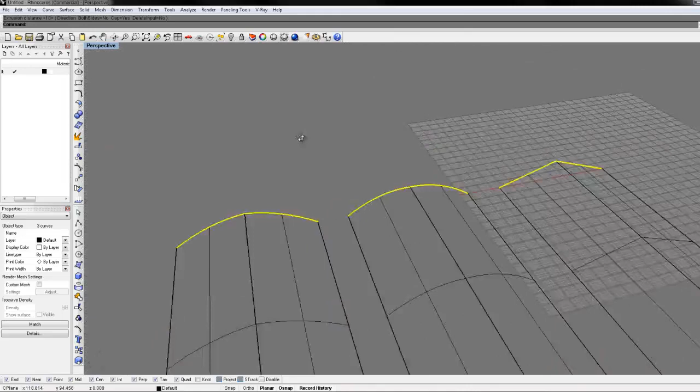So I've got these three lines here. I'm going to join them, so I'm going to extrude them. And they look pretty okay, but there's an issue here, and you can't see it until I turn on the shading or even the rendering. I'll give you a better idea.

So it's a little tricky to see, but there's actually a kink in both this one and this one, and this is due to the fact that the curves don't match. Now, this might be something that you're looking for, like a hard edge, and that's great.

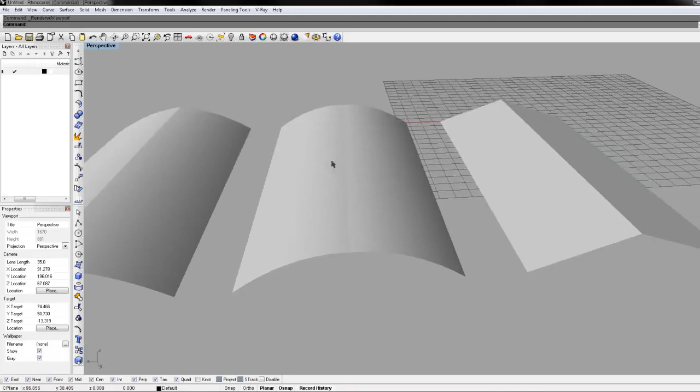But if you want something that's smoother, you need to do something called matching. Now, I'm using this one on the right as a control line so you can see what a pure kink looks like. And if I wanted to fillet this, I could select the edge, hit enter, and that would be nice and smooth. But if you want something that's truly flowing, what you need to do is match the curves.

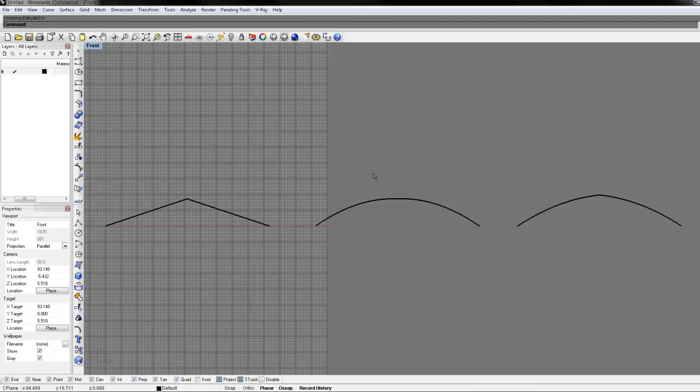Or if you forget, or down the road when you already have your surface built, you can actually match the surfaces. So I'm going to show you how to do this. We're going to hide this one because we don't need it, and we just want to focus on these two.

And the reason we're focusing on these is the idea that if I draw a line across here, you can see sort of how the tangency of these two curves work. With this one, the tangency, if I bring this up and look at it, it looks tangent until you zoom into a straight line and you can see it actually comes above the line.

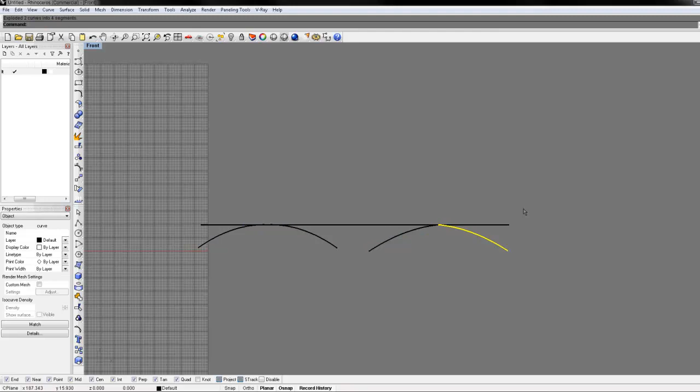We don't want that. I'm going to explode these back so each curve is on its own. And we're gonna match these so that they're truly tangent. One's gonna be tangent and one's gonna be continuous.

What you type is match, and then I'm gonna click on the left one and then click on the right one. And this prompt will come up in Rhino, and this sort of surface and edge and curve continuity are a pretty normal thing. So there's options like this within just about every 3D program.

I'm going to average the curves because I want to eventually join them. And since I have the join option here, I can join them right now and save myself some time.

So the continuity of the curve is sort of how this flows. So if I were to just click on position, nothing's really going to change here, but I want the tangency to be right. So if I toggle between tangency and curvature, you can see what's happening.

Look down here at the lower ends near the end of the curves. It's just a difference in how it flows together. I want this to be tangent, and the other end, meaning the end of the arc, we're going to have that be tangent too. So this is the closest option to what I drew.

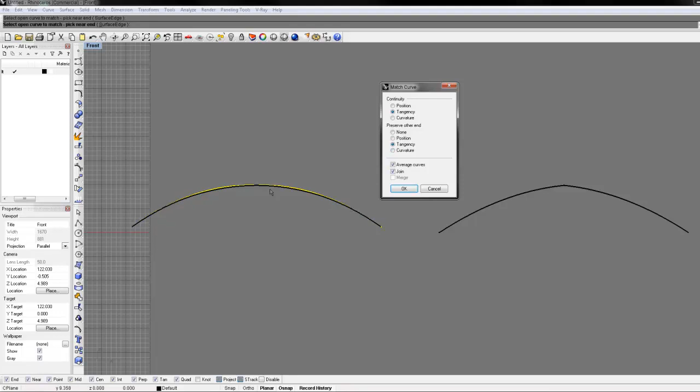If I do curvature, actually curvature is a little bit tighter, so we'll use that and click OK. Now when I extrude this one and render it, you get rid of that kink in the surface. So it's a nice clean surface.

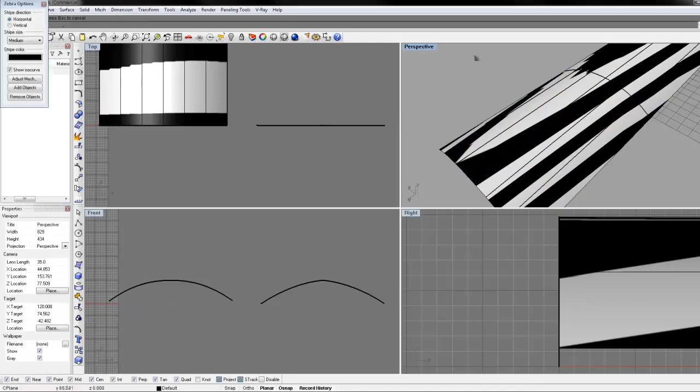There's a surface analysis tool called Zebra built into Rhino, which you can turn on and select your surface, and these lines will show you how your surface continuity is flowing across. This is exactly what we want—nice and clean.

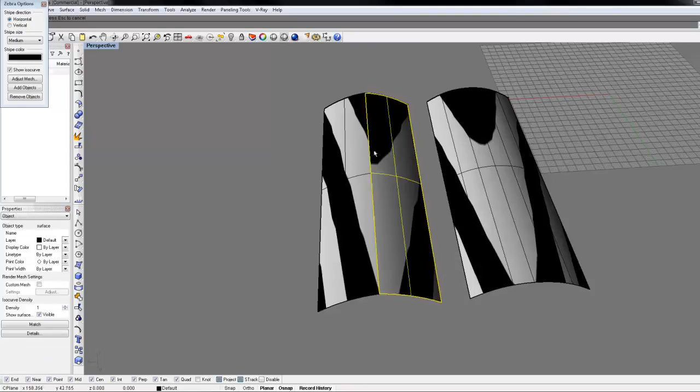If there's a break there, you know you have a kink in your surface. I'll extrude this one again and show you what that looks like broken. You can see the lines don't exactly match up on this one, and that's just due to the fact that those two curves aren't aligned perfectly. We can make these a little thinner.

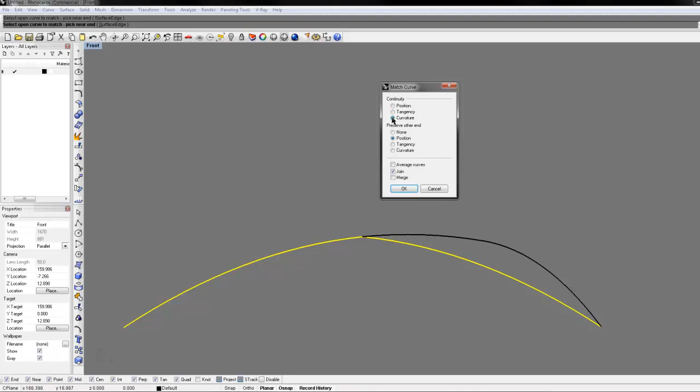So for this one, I'm going to do the same thing, only I'm going to join the curves, and I'm not going to average them either. I'm just going to affect the one side—this curve right here is the one I want to affect. You always select the one you want to affect first. We're going to join them with position, because we want this to start at the same point. We want it to be sort of a curvature, so it's nice and broad.

Click OK. Now that's one curve, and when I extrude it, you can see it's no longer having the kink. However, because of the continuity I chose, it does have kind of a harsh rollover right here. For this exercise, that's fine.

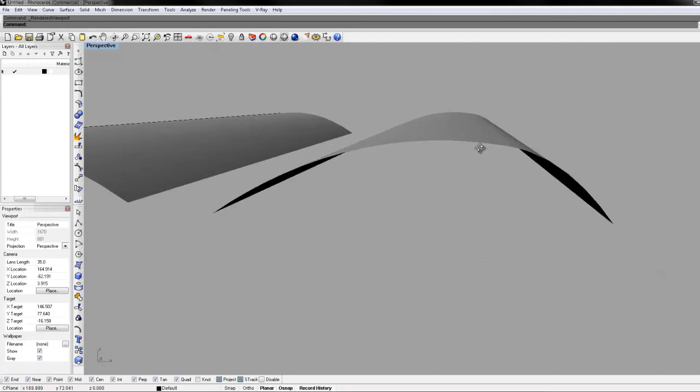The easiest way to control this is when you're building your original curves to just make them as clean as possible. Meaning, if this is initially what I was going for, this is what I should have drawn initially—it was too far deviated from what I originally drew. This is what I originally drew with the intention of joining these curves together and having it be one fluid arc.

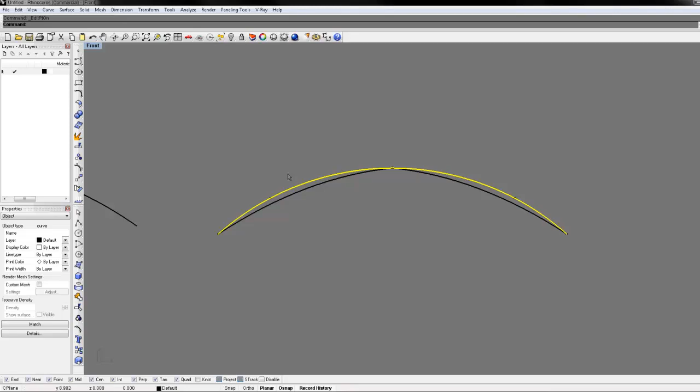The easiest way to avoid joining two curves together is to just draw this as a single arc, and then take your points on here. We'll rebuild this so it has 5 points controlling it. Turn those on, select these two, and move them down. That'll be a cleaner version of that arc.

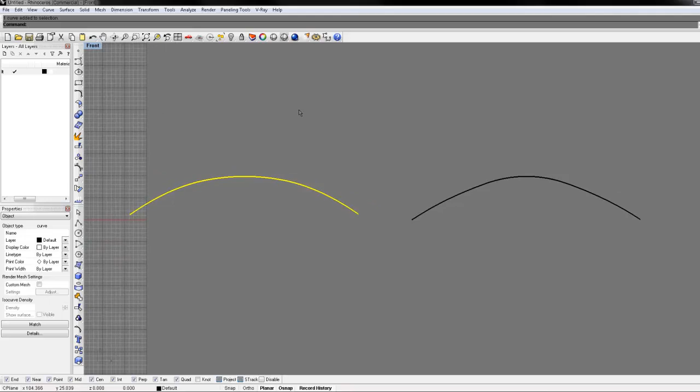So that's something to explore, because when you're generating your surfaces, the last thing you want is some unexpected seam to appear that you have to struggle with fillets to blend back together. Using the match command, which is just 'match', is pretty useful.

Now, one other thing—let's say I didn't match my curves and I just have this original kinked curve, and I'm going to extrude this again. Okay, it's got that form.

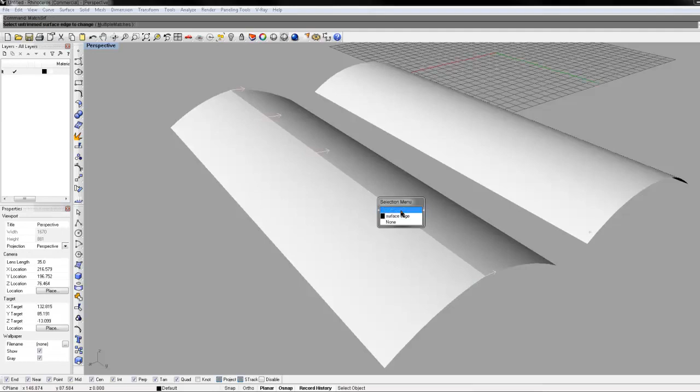The cool thing about the match command is it also works on surfaces. If I type 'match srf' and click on one edge and then the other, it's going to do essentially the same thing, and you can even preview how that's going to change. So we want this to be curvature, and we're not going to average the surface. Every time you change your option here, you have to re-preview it for it to redraw. But essentially it will give you the same result as what we did with the curve, except this lets you act on the surface.

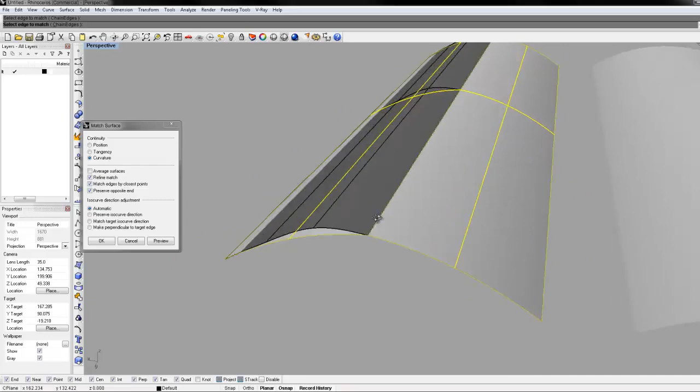So that's how you match things in Rhino, and it's very useful for cleaning up your surfaces.